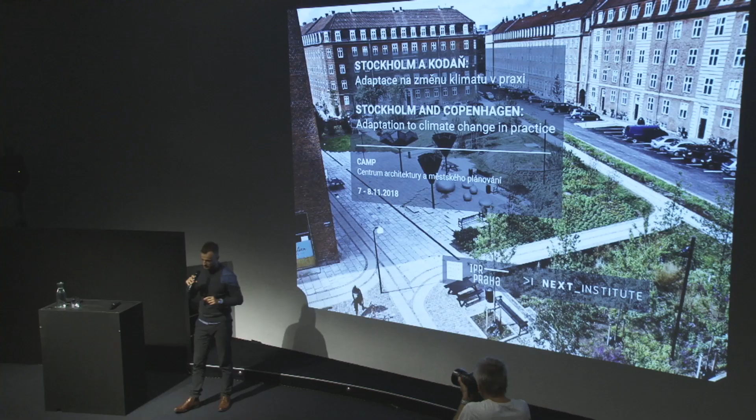So basically today we have asked our guests with topics specifically addressing the needs of the Czech context. Because we work with IPR, we are well aware of what challenges we have, but we are sometimes not really sure how to overcome them. We know that our friends from abroad have experience with these topics, so they are here to help us. It's not just another talk about sustainability, but something very specific, so we hope this conference can have a real impact.

Today we have a public lecture, and tomorrow we have a meeting for experts with lectures and workshops. We're going to try to uncover the key points with Czech experts, working together hand in hand. I would like to talk a little bit more about our organization and what we do.

We do applied research in architecture and urbanism, and we work a lot on adaptation to climate change, and this is what brought us together with IPR.

We're originally from Brno, and we know the city has a strategy for how to adapt to climate change. Many cities in Czech actually do — the major ones, Prague, Ostrava, Brno, are all covered, and even the smaller ones. What we don't know is how to implement the strategies, where to start, how to do the first steps, how to do pilot projects.

So we thought it could be cool to try something quick, like a brainstorm on a model, so we made this installation. It was there for the autumn, and the goal was to try to collect data and see how this works. This is a preliminary look — we're still working on the data.

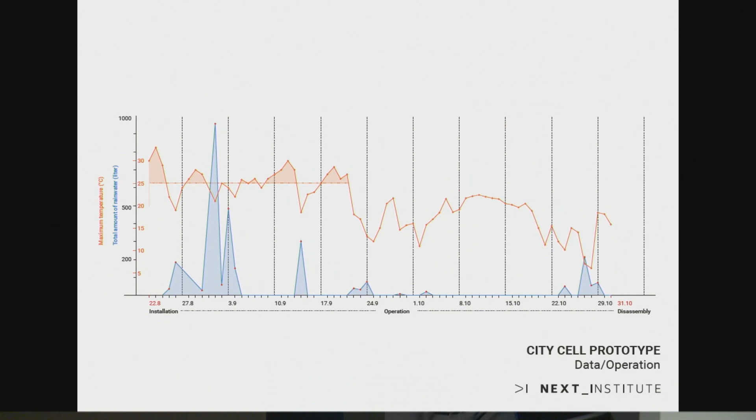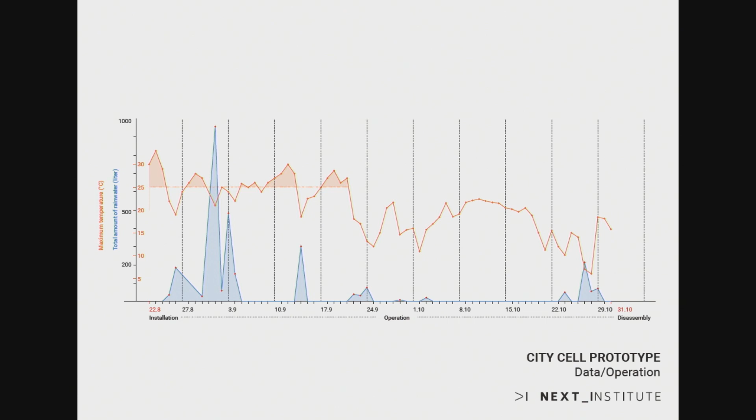What we can say is that we have real trouble with the extremes. The blue line is the rainwater, and the red line is temperature. You can see the combination of high temperature and no precipitation is really problematic. In order to keep our urban greenery healthy, we need to add a little bit of technology. That was our goal — to find these loopholes and figure out how we can assist urban greenery with a little technology.

You're going to see more of our work through our Facebook and web page — we're going to publish the findings of this project. But basically, this is exactly what we want to talk about at this conference: implementation, doing real projects, and pilot projects.

So I would come back to the first slide and ask the first speaker to give us a little introduction to the Prague context — the head of the Green Infrastructure Department at IPR, Mr. Jan Richtr.

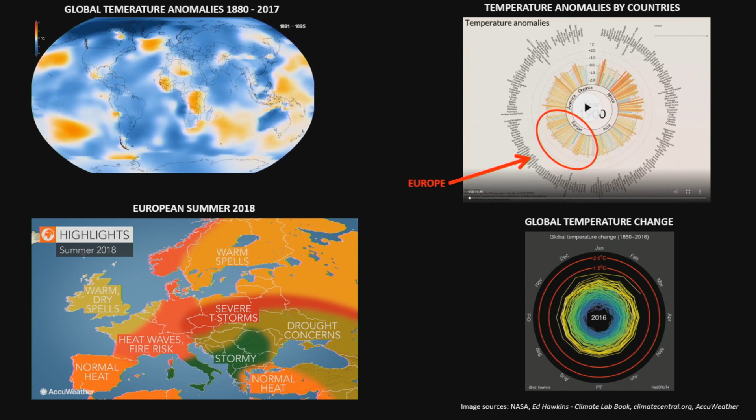As you all know, in the last decade, or maybe a couple of decades, not just here in Europe, in Central Europe, but all over the world, we are experiencing climate change. In recent years we are not only reading about climate change in news and scientific articles, but actually experiencing it in our real lives. This summer was proof of that, and we, much more than before, have to solve how our cities will adapt to this changing situation.

As you know, most of the population today, not just in the Czech Republic or Europe but also globally, lives in cities, and cities will be the place where our future happens. From the dawn of civilization in the Middle East, where cities started, until today, where megacities, the megalopolis, are the center of trade, economy, and also our culture — cities are and will be where basically most of the things will happen.

So the cities are our future, not just in Europe, but also worldwide. We have to learn how to make them livable and how to stay cool and dry in the cities. The future can look like this in 20, 30, maybe 50 years from now. It can be vibrant, green, livable cities where we are going to live, or it will be flooded with heat and drought. What will become depends only on us.

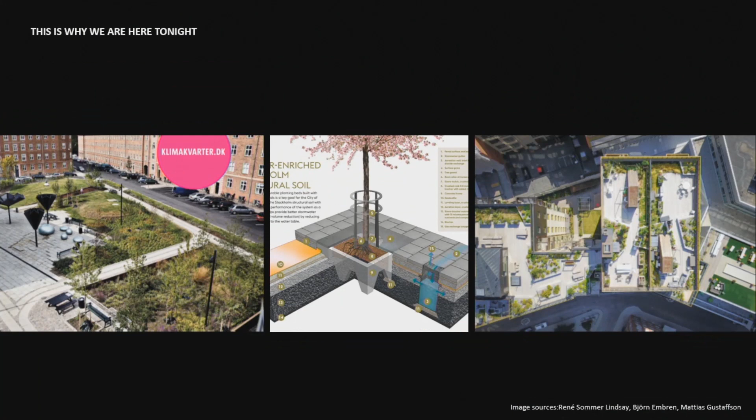We also are part of some European projects, and this is why we are here tonight, to hear what we can do and how we can change our city, how we can adapt, and how we can employ nature for our benefit. So thank you, our guests, and thank you for listening, and enjoy the evening.

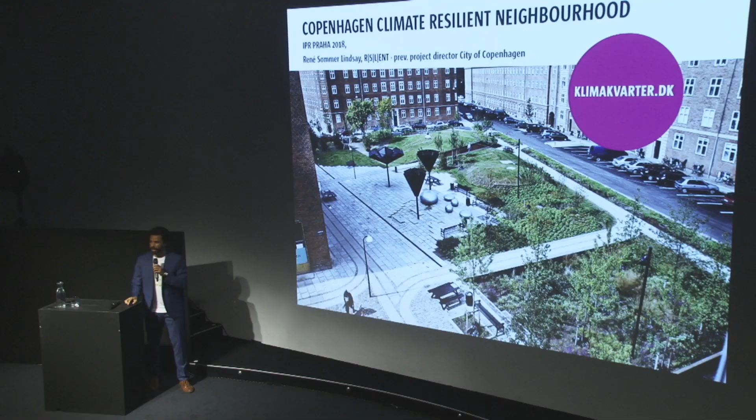Thank you so much for inviting me. I'll speak a bit about Copenhagen. I worked with the city of Copenhagen for almost 10 years in different roles, most recently as an advisor on the citywide adaptation plan, and before that as the director of the project Klimakvarter, where we did the first adaptation solutions. So I'll be speaking about paths to adaptation, structured around four themes: urban leadership in a wider context, and then how we got to implementation and achieving further support to implement the full plan.

Copenhagen is, in urban planning circles at least, a well-known city. We have Jan Gehl, we have a very ambitious climate action plan to be carbon neutral by 2025. We pride ourselves on being the best cycle capital in the world, even better than Utrecht or Amsterdam, whatever you might think. It's well known as a rich, well-off city, usually one of the best places to live in the world by all these standards. Lonely Planet said it's the best place to go also next year, so come visit, although I'm in Edinburgh at the moment, but I'll be back.

But of course there are also issues. Some of the main issues in Copenhagen is that it's a very expensive city, so we are experiencing a degree of urban inequality. It's difficult to find affordable housing, and we do have areas of the city that become a bit run down and overlooked. We also have strategies to deal with these areas, and that's actually where I started. I started working with urban regeneration in an area called St. Kjeld's Kvarter, which is kind of the outer part of the inner city.

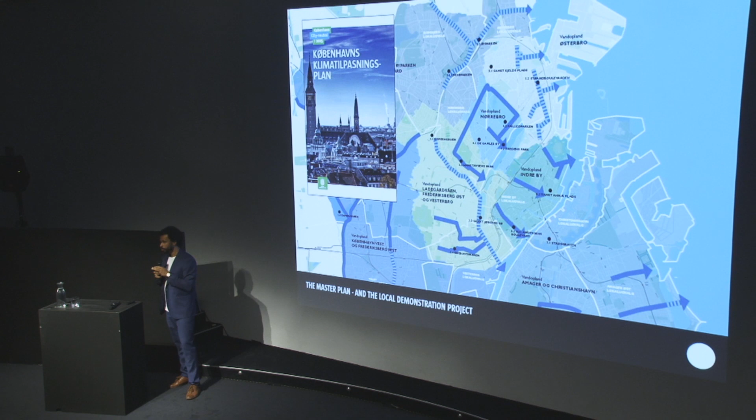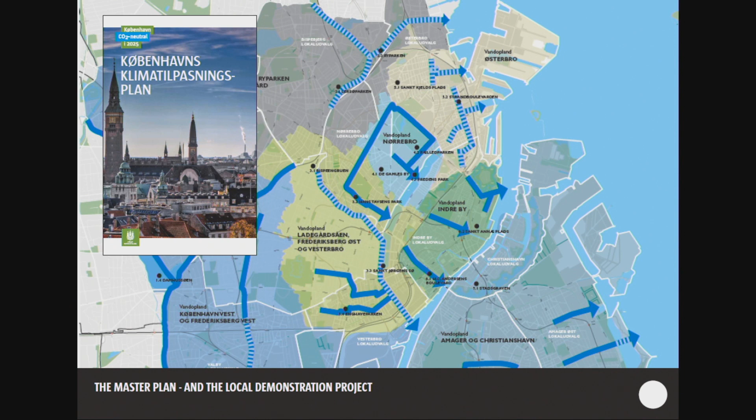It took some years, but at the moment the politicians of Copenhagen have actually said that within the next 20 years we're going to spend €1.5 billion implementing around 300 projects around the city to handle rainwater. There's been an analysis of rainwater flows in all of the city in 7 different catchments, looking at natural rainwater flow and how we can steer the water out of places where it does damage and into the sea or into big parks where it doesn't damage buildings or people.

But of course, a €1.5 billion plan is not something you build overnight, and we needed to get experience with how to actually apply it. That's where we had the opportunity to become the Klimakvarter.

To begin with, I was the head of områdefornyelsen Sankt Kjeld's Kvarter, and this was a local regeneration project, but we partnered up with the wider city's climate adaptation plans, with the local Agenda 21 Center, with the utility company HOFOR, with the Ministry of Housing and Development. And what we basically did is started to speak together and combine our budgets and combine our stories, essentially combining the narrative of where we were going.

By getting shared goals and shared interests, we could create the concept of Klimakvarter. So Klimakvarter doesn't actually exist. It's just a website that collects a number of ongoing projects that different actors were doing. But it became very impactful in that form.

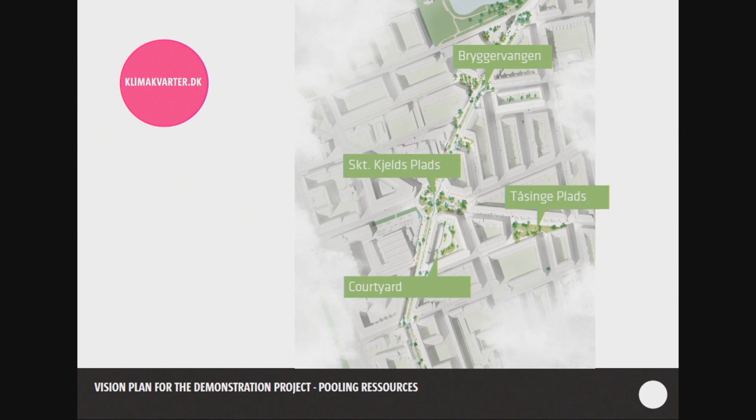Together we developed a vision plan for the area, developed by the studio Tredje Natur, involving changes to streets, to squares, and to inner courtyards. We started to show people in the area how it could look in the future, how they could reimagine the area. So involving the community was our next plan.

The area, as I said, is—I'm not going to say socially deprived, because that would be saying too much. Denmark is quite a rich country, but it's the poorer part of Copenhagen. There are certain buildings that have very high levels of social deprivation. We also have another corner of the area where the Prime Minister used to live. So it's a mixed area, and what was really obvious to us when we were there was that people weren't connected. They weren't speaking to each other, they weren't really interested in each other. But Klimakvarter became a way for us to make it into one coherent neighborhood and to make the people speak to each other.

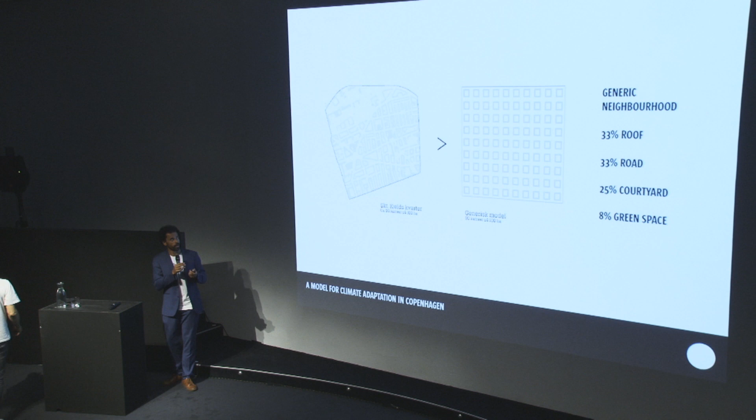We wanted to create a model for climate adaptation that could be used in the rest of the city. So we needed to speak about the area as a generic urban form, and it is this classical Copenhagen, or really a continental European urban form—5 or 6 story houses, around 33% of the area is rooftop, 33% is street, a quarter of the area are inner courtyards, and less than 10% are green spaces.

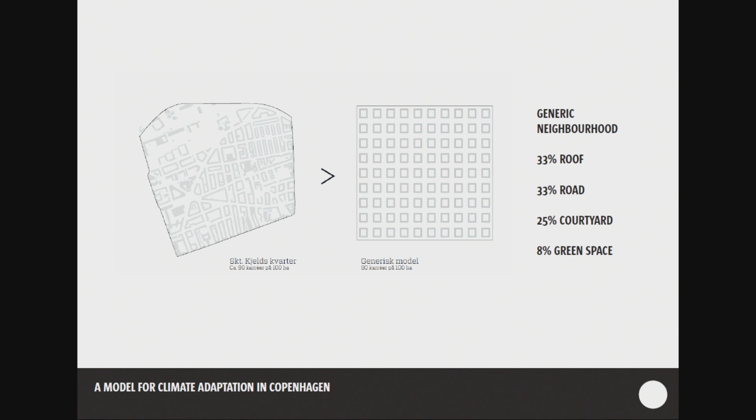What we wanted to find out is, in the future, when it rains, what do we do? Tredje Natur actually won this early competition by proposing a very simple tactic, looking at the streets, concluding that we didn't have a lot of traffic, but we did have a lot of parked cars. It was actually possible to cut away 1/5 of the street width to liberate 50,000 square meters of asphalt and turn it into green space.

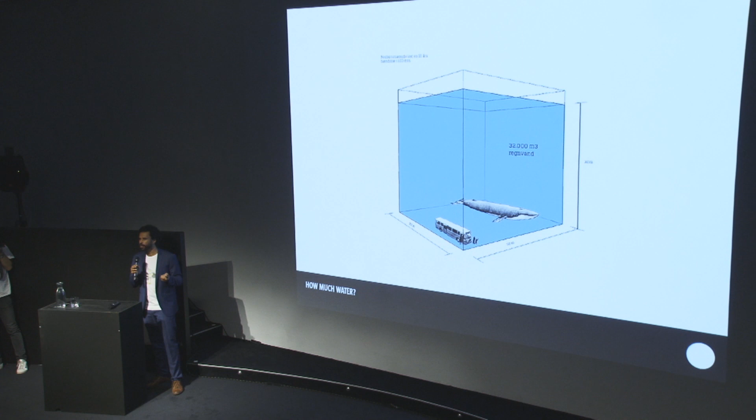That would, of course, make the area more beautiful, but also give us a place to handle the rainwater. This is the amount of rainwater that falls within the area in 2 hours during what we call an everyday rain. So essentially, this is the capacity of the sewer system today.

If any of you are hydrologists or hydraulic engineers, I should be speaking about flow and Q values, but that's not important. It's a pedagogical approach to speaking about water with the people in the area. So this is the amount of water we could handle.

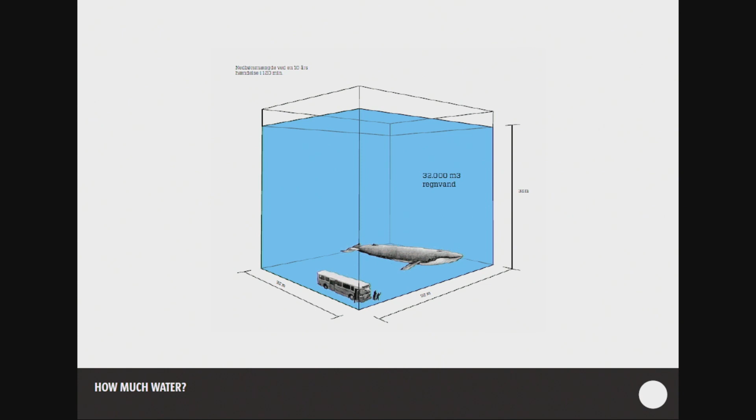This is the projection of everyday rain in the future, and this is the amount of water that falls in what we call a 100-year rain. The extreme event we had in 2011 was actually a 400-year event, even more than this. But the business case in Copenhagen is to say, if we can make sure the city can handle this amount of rain, we'll be doing all right.

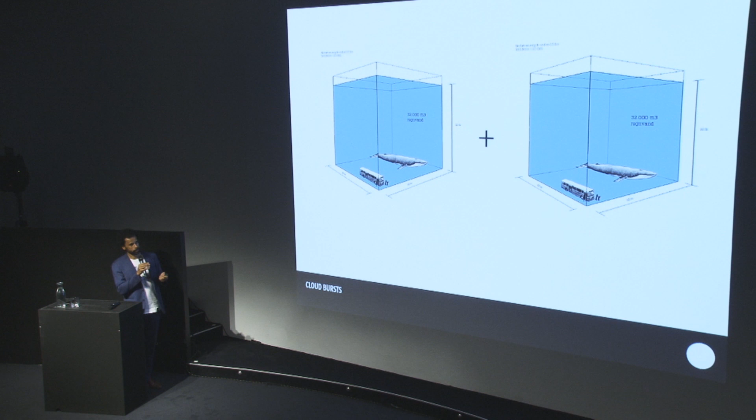So it's a technical approach combined with a soft landscape engineering approach. The technical approach is that we were close to the harbor, out here, and we needed to find the central lines to get the water out there, the blue lines essentially. But we also wanted to provide improvements to the area.

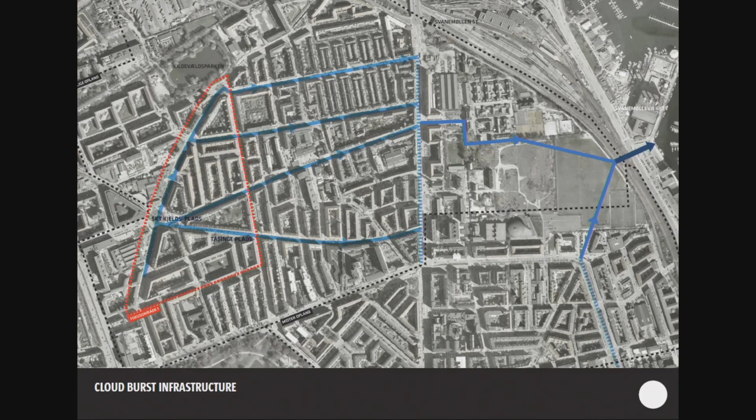We also did a mapping of spatial potentials of areas such as Tåsinge Plads and Skt. Kjelds Plads, that had a lot of excess space and opportunity, and we mapped out where we could improve it. This became a layer on top of the technical infrastructure, saying that if we provide green infrastructure for handling rainwater during everyday rain occasions, we can also bring benefits to the area when it's not raining.

And that's the strategy behind Klimakvarter. This became a way for us to speak with people in the area and get them involved in our project, to help them, to let them help us understand the potentials in the area and how we could benefit them with the project.

Our next step was to support the first movers and help people get into the understanding of what we were doing. Tåsinge Plads is a good example of this work.

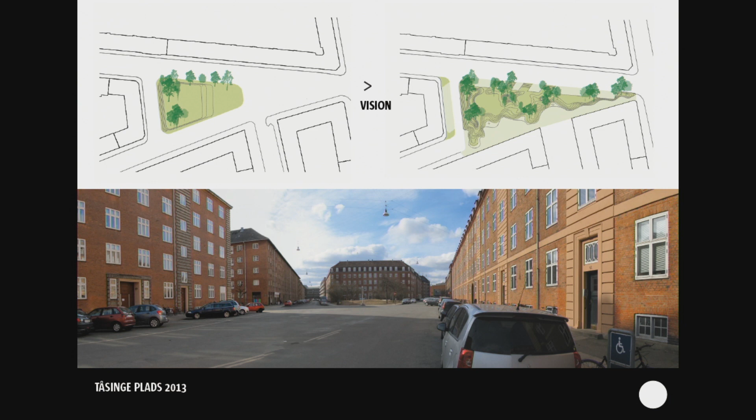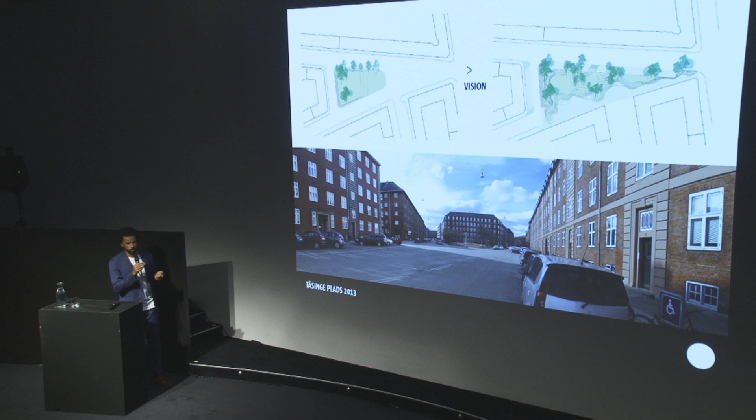We had an area with a lot of excess asphalt, open streets. In terms of traffic, it was a bit dangerous because you had two two-way streets meeting on top of each other, which from a traffic engineering point of view is very impractical, but also it was just not a very nice place to be. And we needed space to open up that we could use to handle rainwater.

So the basic idea was to expand the green space all the way out here, basically dig a big hole and put water into it. And this was the idea that we presented to the area.

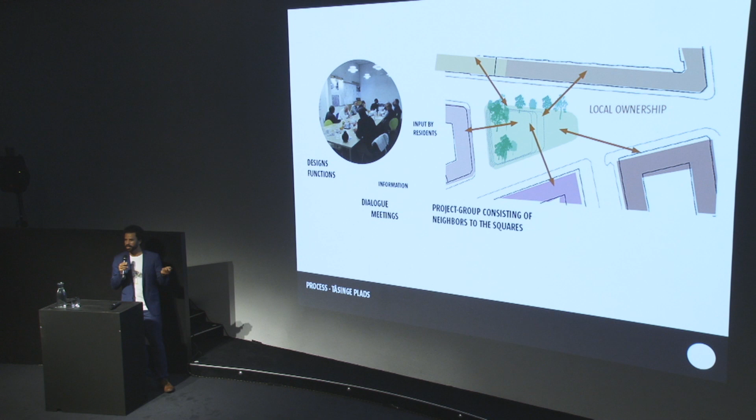Then we started speaking to them about how best to do it. We held a lot of meetings with residents associations in the areas and got their input. At this point, it was actually a private street, so we couldn't do anything without their approval. So I went to a lot of coffee meetings with these people to try to convince them this was a good idea. Even though the municipality was bringing pretty much all the funding, we really needed to make them see that this was something that was necessary.

Of course, it helped a lot that we just had a giant cloudburst and all their basements had been flooded. But still, it was very important to get their support and also get their information and their resources to help us make a better project.

So we also went into the square. This small square here was a small green spot before, but locally it was called Shit Island because it was mainly used for dog walking, or only used for dog walking. And because it was only used for dog walking, people were pretty much just leaving stuff behind.

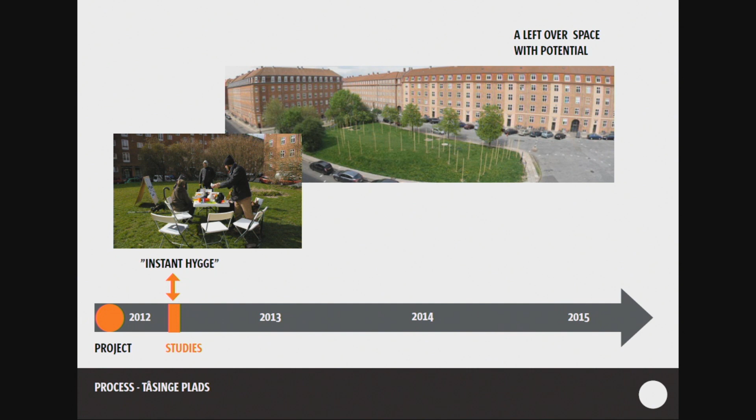So we worked with a number of international artists who had a residency in this one building with the most social deprivation. They got a flat on the 11th floor and lived there for 3 months doing projects in the area. One of the projects was that they found Tåsinge Plads. And this guy, David, did a project called Instant Hygge.

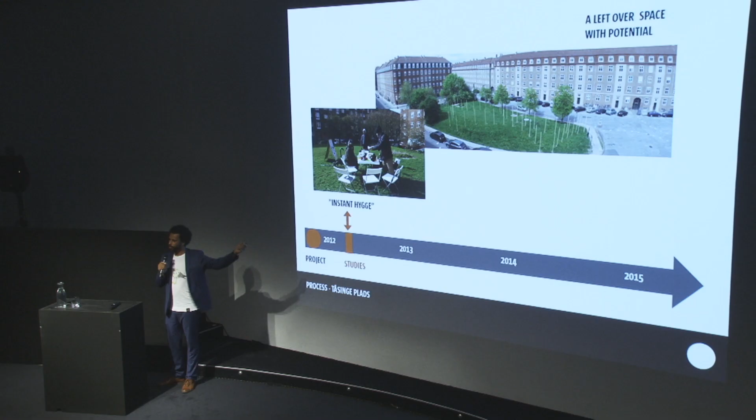I don't know if you've heard of the Danish concept Hygge. So, Instant Hygge, free coffee. He went there every weekend for 3 months with a sign saying Instant Hygge, free coffee, and these pull-up chairs, and asked people to sit down and speak to him about what the area was, and change the mind about what Tåsinge Plads could be. And it also informed our project.

We also did some larger scale projects. This is the former Minister of the Environment, scything the area. We did some small festivals, a large festival, and just started to get people thinking about the potentials of this area in a new way.

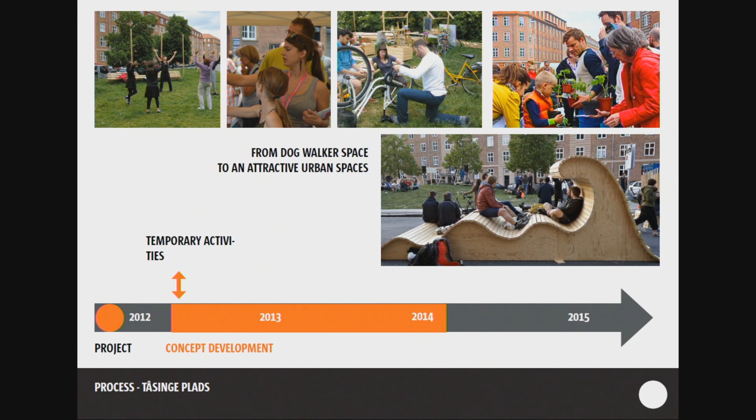And all the input that we got from people using these spaces, coming to our events, speaking about what type of planting they would like in the area, what type of activities, what type of urban furniture they wanted, gave us input to the project that we could build in the future.

Something quite unique for Copenhagen was that the project was actually signed off by the 5 housing associations around it. I was part of writing the design brief that the landscape architects did, but it was actually the residents who approved it.

So the Klimakvarter project became kind of a platform for us to collaborate with the community and to build a sense of community in the area. But it also became a platform for them to start speaking to the rest of the city and to reach out to politicians, speaking about all these ambitions we have for the city and why funding wasn't coming to that area. And it was quite useful.

The farmhouse was turned into a restaurant, and it became an attraction that people from abroad would go to Noma, and they would go to this place to eat. So suddenly we had a destination, and this overlooked part of Copenhagen was something that people wanted to see. It really changed the whole concept of the area.

So climate adaptation for us became partly a technical solution to help, but very much also about changing the whole mentality in the area. Last, I just want to say that the municipality is actually still constructing out there.

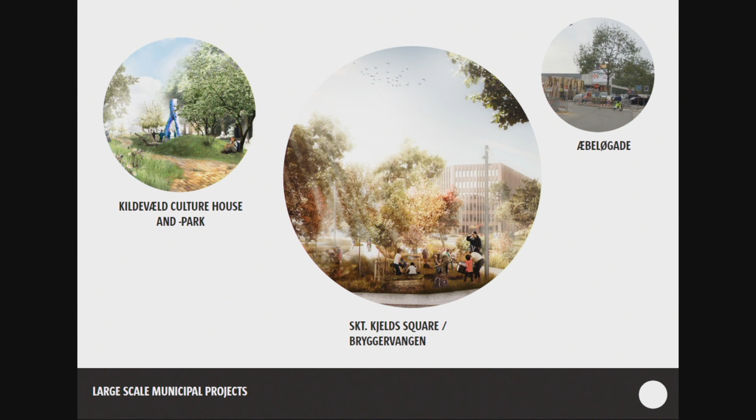We're building a culture house that will be finished in 2020. We're building Skt. Kjelds Plads, which will be finished within a couple of months. And we're still supporting a lot of small-scale projects just to keep the atmosphere going.

It means a lot because they own the story, but they also tell the story, and when politicians see something good happening, they want to fund it, they want to promote it, and they want to help it. So we got a lot of credibility by doing this project and delivering it very fast.

I don't know how it is here in the Czech Republic, but we presented the first idea in 2012, and we had a finished project in December 2014. By Danish standards, that's like Usain Bolt fast.

But it was really good, because people liked it, and they saw that we meant it seriously, something was happening. It gave a lot of good press. It gave a lot of further funding for the projects.

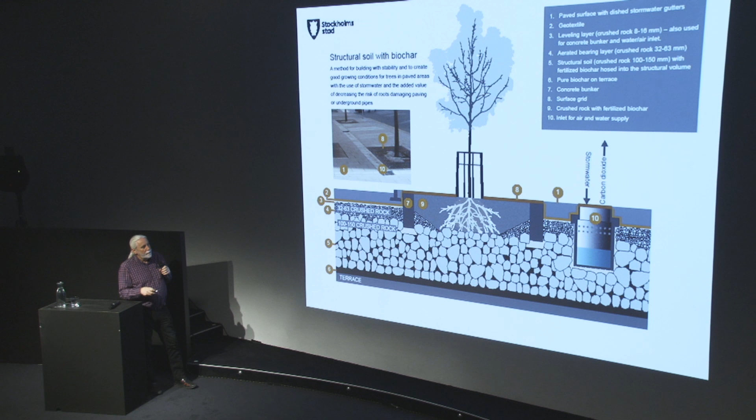So I couldn't touch that level at all, and I had to think of a way to build a planting bed for the trees below the surface. This is how it looks: we use big stones, 100 to 150 millimeters, put out in 30 centimeter layers and compact them heavily. Then after the stones are placed, we flush down material between them—in the beginning it was soil. We put the next layer of stone on top, so they always get support from the stones below, and compact it again. This is the planting bed for the trees, where the root system develops, and there's enough porosity in that material for the roots to grow.

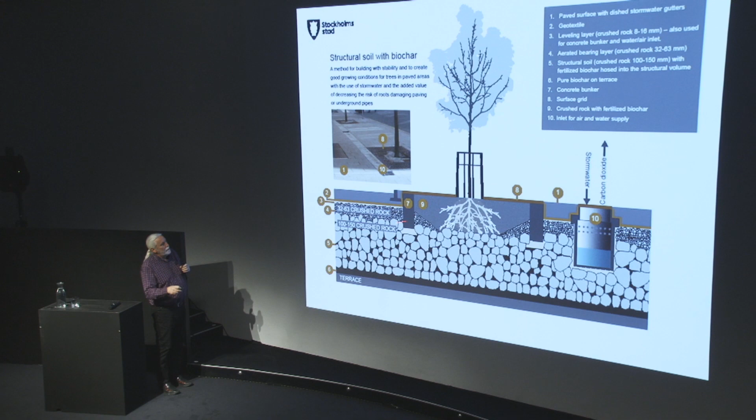On top of that, we put a clean layer of stones, 32 to 63 millimeters, also almost single-sized like a fist, and compact that too. That layer is for infiltration of stormwater and to get the gas exchange to work. And that's the really important thing—these layers make the gas exchange work.

The solution to get gas exchange in the ground was to put in a well that could take in the stormwater. At the same time, as the water goes in, it presses out the gases from the ground, and when the water drains away, it draws in oxygen from above.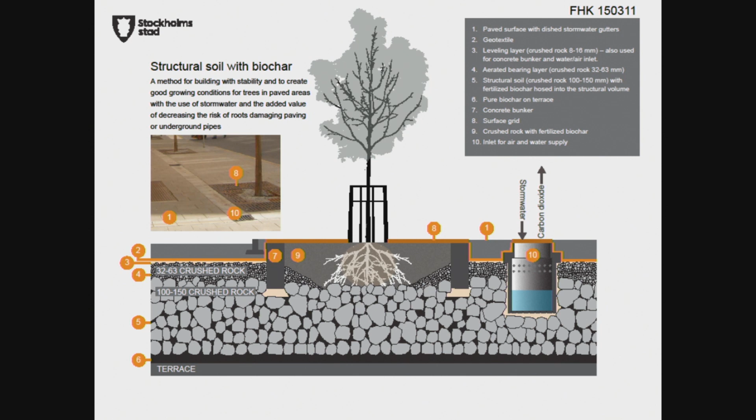So this was a great success from the beginning. The first trees we planted in this solution started to grow immediately, and we have used it and built it in Stockholm in the same way since 2003 now. So we have around 15 years of experience of this kind of construction.

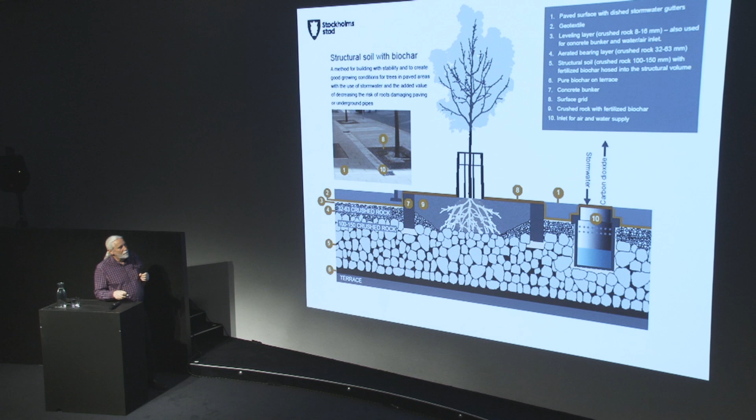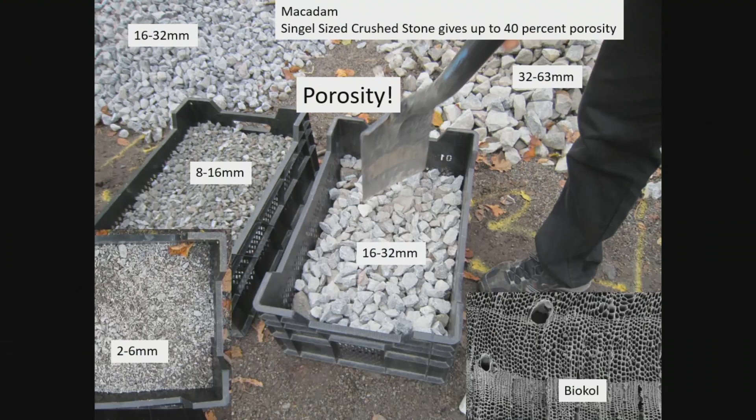And it really gives you the opportunity to build something in old cities. It's easy to combine in quite narrow streets and sidewalks, you can still have the old kind of sidewalks if you do this kind of construction below ground. And what's most important is this single-size kind of stones that we use all the time, and that gives us the porosity of the material. That's the most important thing to remember with our solution, that we always use this kind of material.

And when we combine this with biochar - I don't know if someone knows about biochar here. Raise your hands. One, okay.

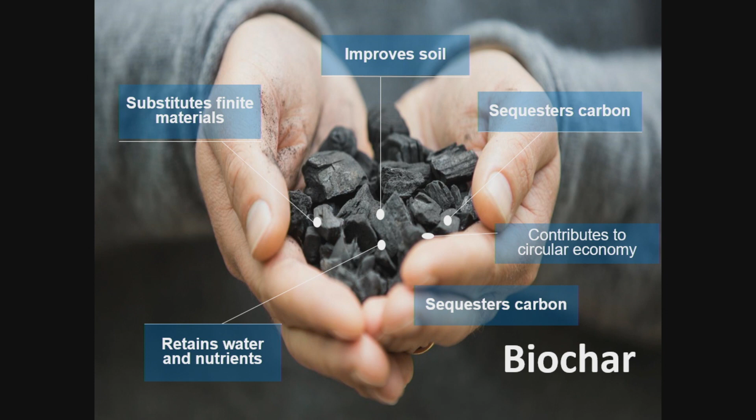This is a big issue in Stockholm. We have stopped using soil at the traffic department. We don't use soil anymore when we plant trees, perennials, shrubs, and things like that. We combine this stone material, as you saw before, together with biochar. Instead of using soil, manufactured soil, we use this kind of mixture with biochar, which has the possibility to keep water and nutrients, and it can clean water.

It acts as a filter material. If you put stormwater down to the ground and you have this material, it acts as a filter. So this is the way it works.

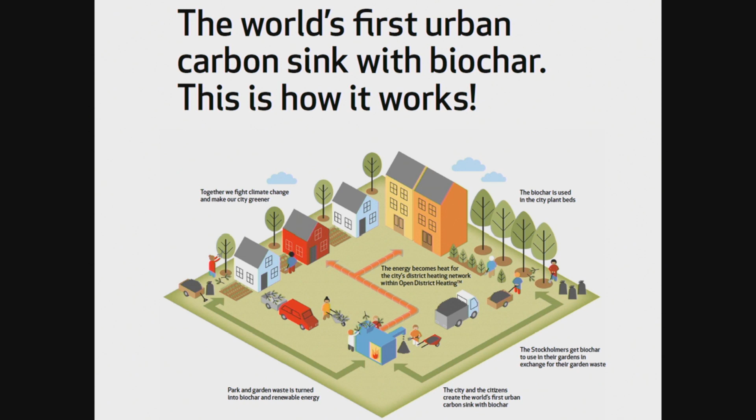We collect garden waste from the citizens of Stockholm, and they come and give it to us at the recycle centers, and we collect it and transform it in a biochar plant, where we make the biochar in a pyrolysis process, heating the organic material in oxygen-free heating, and then we get biochar from it.

Then we use it when we plant the trees in Stockholm, and we also give it back to the citizens of Stockholm so that it can be a part of fighting climate change, because they use the biochar, and at the same time, when they use it for their garden, they lock down the carbon dioxide in the ground.

So with this idea, we won €1 million, so we could build this kind of biochar plant in Stockholm. Now the citizens of Stockholm can go and leave their garden waste, and they will give them back some biochar that they can use in the garden. Most of it I use for the trees in Stockholm.

So this is the basic mixture we use in Stockholm now instead of soil: it's 6 parts of stone, 1 part of compost, and 1 part of biochar. This maximizes the porosity in the ground, so the root system can develop extremely well, and they can develop in any direction they want.

If you have this kind of mixture in the ground, you can use different sizes of stones depending on where you are. This is the smallest fraction, 2 to 6 millimeters, and that's what we use in open perennial borders, shrubs, plantation, or for trees when it's open ground. And if you have heavy traffic, you use this bigger size of stones.

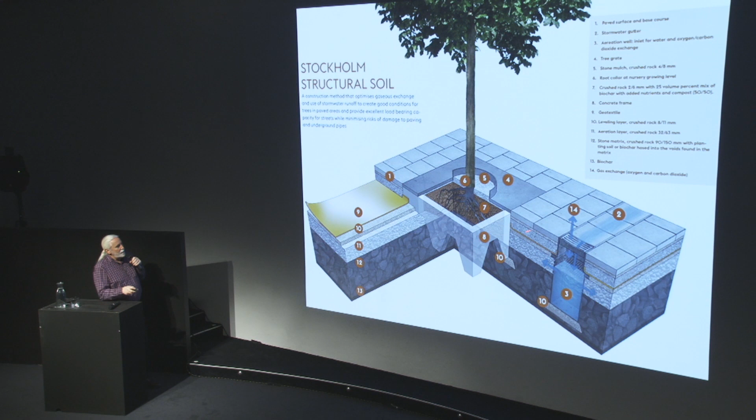You can see the concrete slabs on top, and you have the well. We try to collect as much water as possible from the roofs and from the sidewalks and from the streets, and collect it and put it down to the structural soil, as we call it. We separate the upper layer that the civil engineers want to have with a geotextile.

Below the geotextile we have this 32 to 63 millimeter size of stones, and below that we have the bigger size of stones. This is for surfaces that have really heavy traffic on top of it, that we really have to have a strong construction.

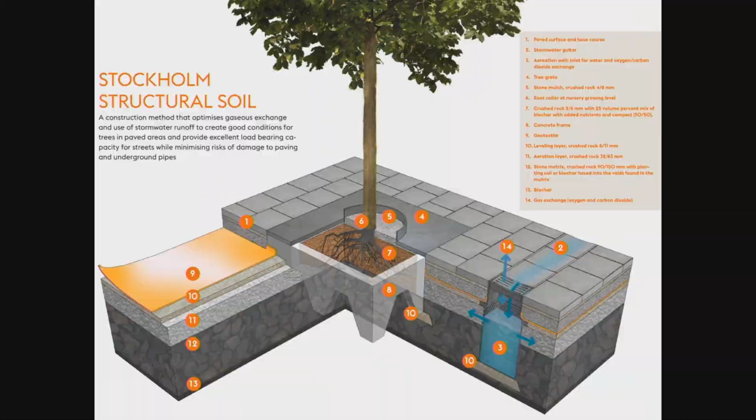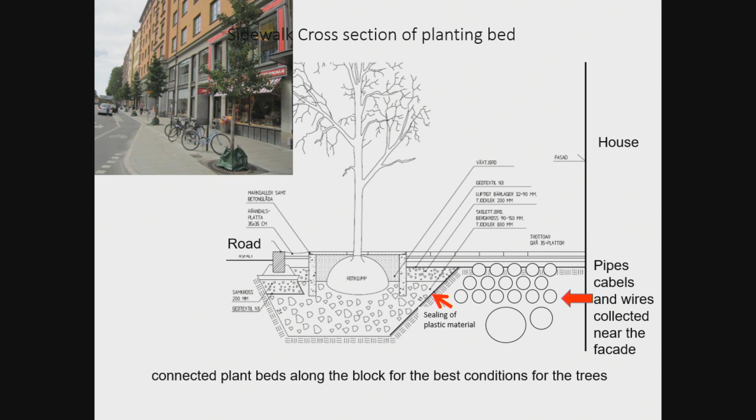We always try to connect as many planting pits as possible, because the bigger areas you can connect to each other, the trees will have better opportunities to develop in a good way. We try to put all the small cables and everything close to the building, and have our construction closer to the road. So this is how it looks.

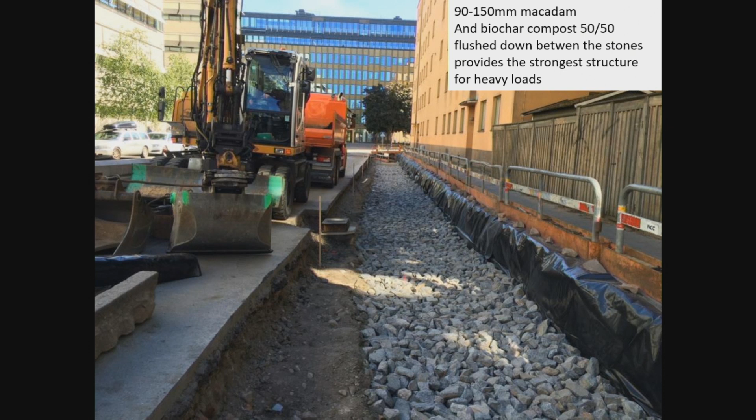We usually do excavation to 1 meter deep, and then we start to fill it up with this big size stones and compact it heavily. The plastic material is just to protect the buildings and the cellars, so we won't press the water into the cellar.

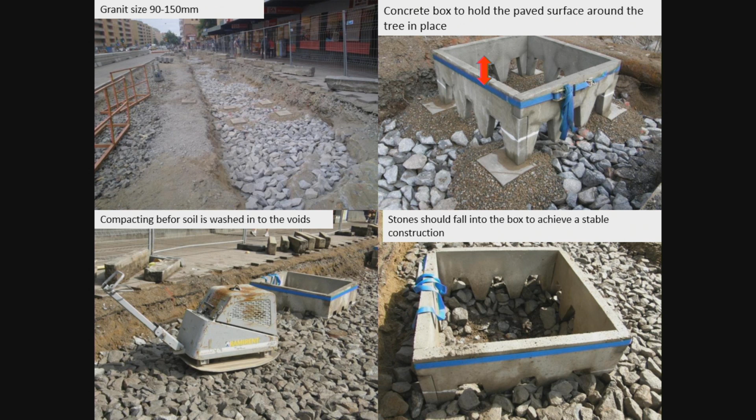You see, the planting pits are connected all the way through the blocks, and these concrete boxes protect the surrounding construction from falling into the tree pits. We plant the trees inside these concrete boxes. This is how we compact the stones, and when we build it, it's important that the stones fall into the openings, so you keep the construction in a good way.

It's no problem to have cables and pipes and everything in this kind of construction. It doesn't harm the tree roots in any way. In the beginning, of course, the owners of the cables and pipes are a bit afraid of what we're doing, but we are convinced, and now it's no problem anymore to build it like this in Stockholm.

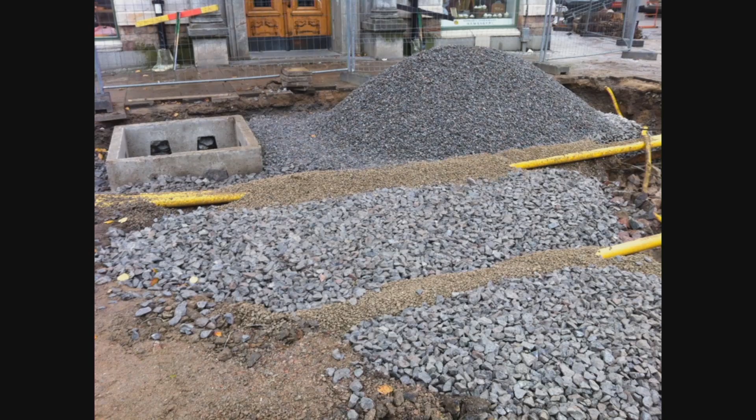So this is when we have a hose with water and flush down the mixture of biochar and compost between the stones. This is when the voids between the stones are filled with the biochar and compost.

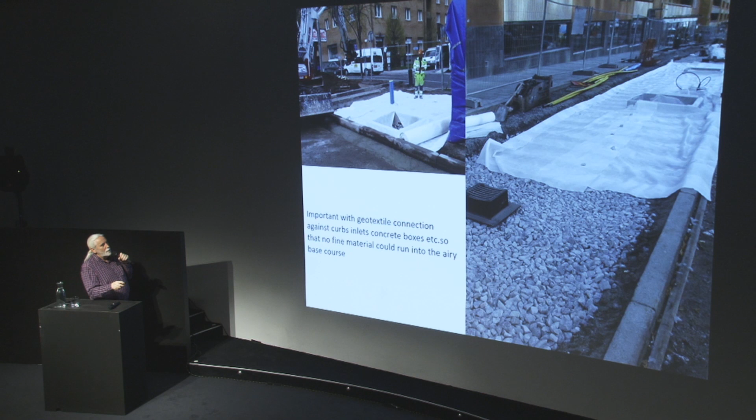So this is 2 layers, and now the infiltration layer comes on top. Here's the infiltration layer and the wells that take in the water to let it out into this infiltration layer, and then we have the geotextile. Then you can do anything on top of this. You have secured the porosity, the gas exchange, and the water for the trees in this way of building.

The next step is to find out the best way to collect water, to get as much water as possible. It's quite dry in Stockholm — we have 600 millimeters of rain water every year, so it's extremely dry. In the beginning we just took water from the sidewalks, but now we take it from everywhere, from the streets, wherever we can get it.

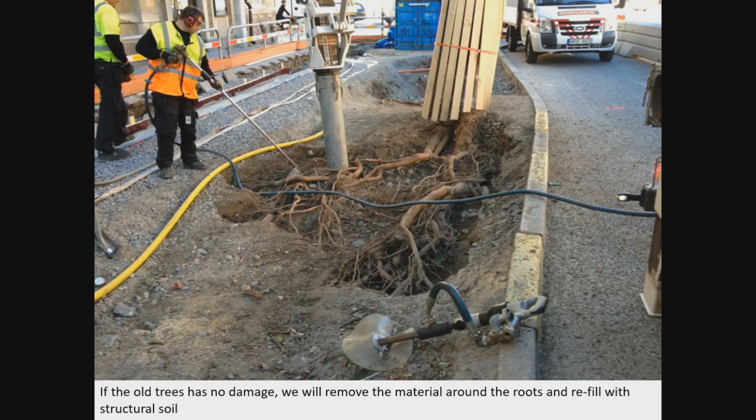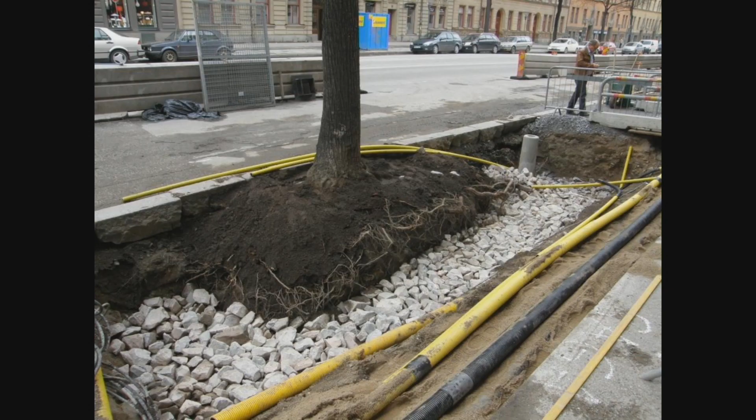Of course, if you have old trees, we take away — if they're in a good enough condition — all the old material that is bad for the trees, and put our own structural soil instead around the tree roots. This is how it looks when we've done this work on old trees, and we start to build structural soil around them.

A good thing about it is that the mycorrhizae also love this kind of solution, because there's so much oxygen in the ground, high humidity in the ground. So after just 1 year, you can find a lot of mycorrhizae in the ground, and that will also support the trees and make them develop in a good way.

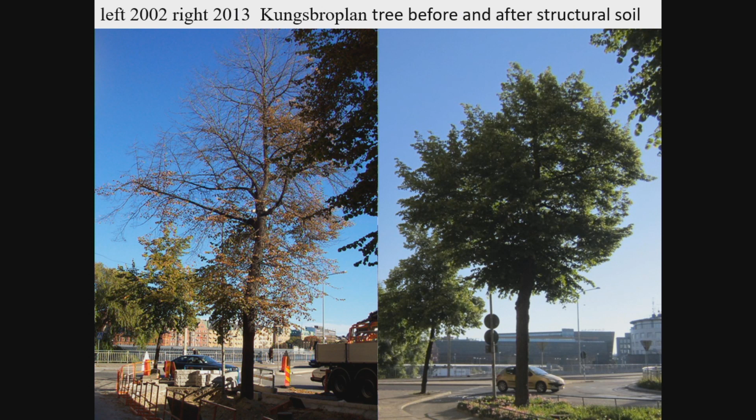This is one of the pictures that really made it for me in Stockholm, when I tried to convince the bosses and the politicians that this is a good way of handling trees, because this is how it looked after a couple of years. This is when we did the renovation of the old tree, and it's easy to understand the benefits of a tree that looks like the one on the right side compared to how it looked before. There are no environmental benefits from that tree, but from this tree you get a lot of benefits.

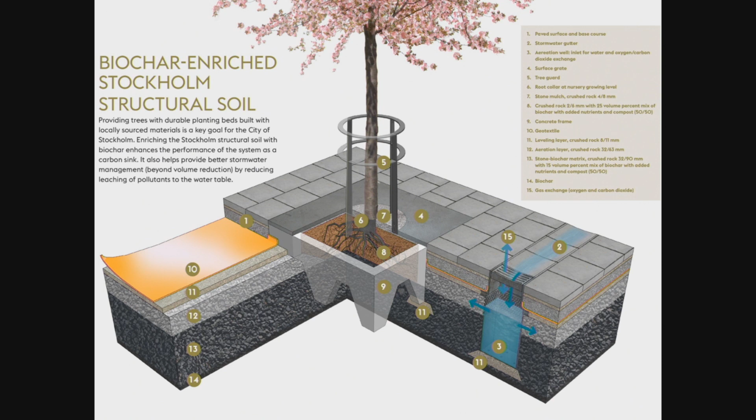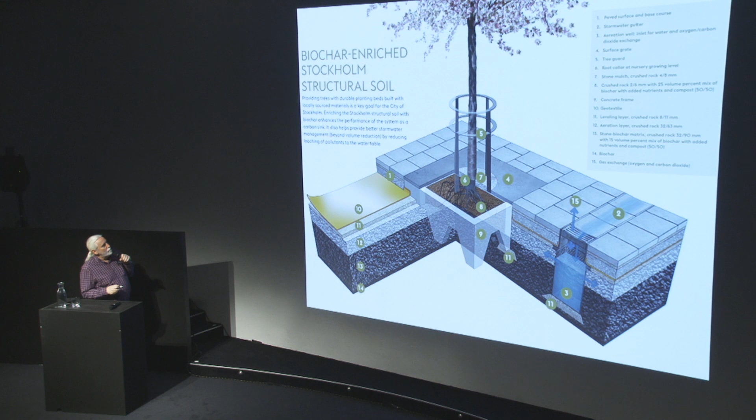And of course, in the beginning, it was just to save the trees, but it has been more and more. The most important thing is to take care of the stormwater locally, and so this is the solution that Stockholm proposed to solve the problems in the city for the 20-year rain. It will cope with that, and it's enough to work with. So this is what we work with in Stockholm all the time now.

Different kinds of sizes of stones depending on the loads on top of the construction. The smaller size when there's no load at all, and the middle size when there's a middle size load on top.

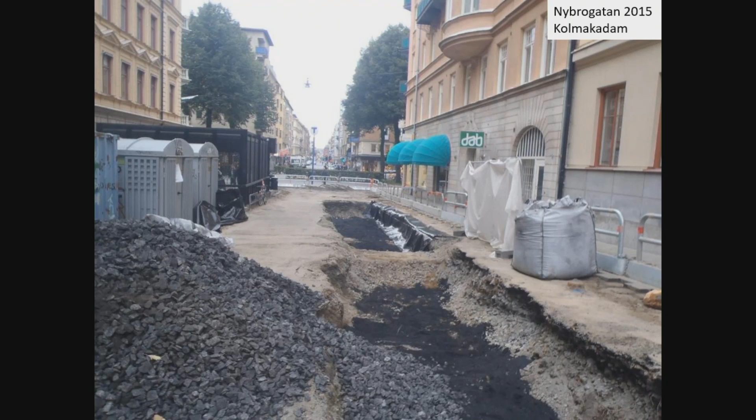So we use this biochar, when it's clean, as a filter in the bottom of the construction, and then we put the stone with a mixture of biochar and compost on top of that, and then we plant the trees on them.

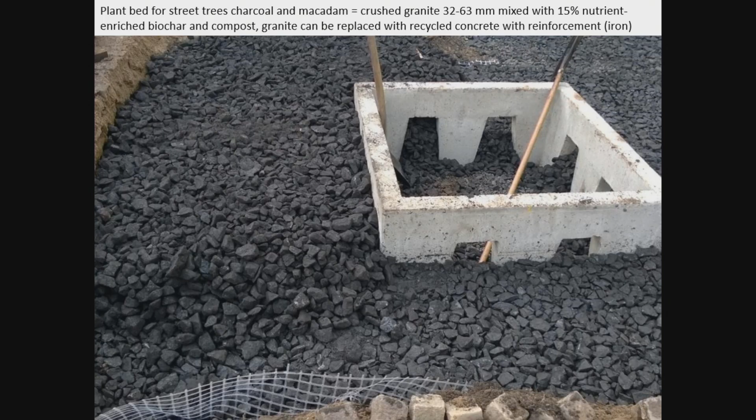What's happened, one of the clues in this solution, is that there is no limit for the root system to develop. They can go in any direction they want, and that's why they get so resistant when it's dry weather.

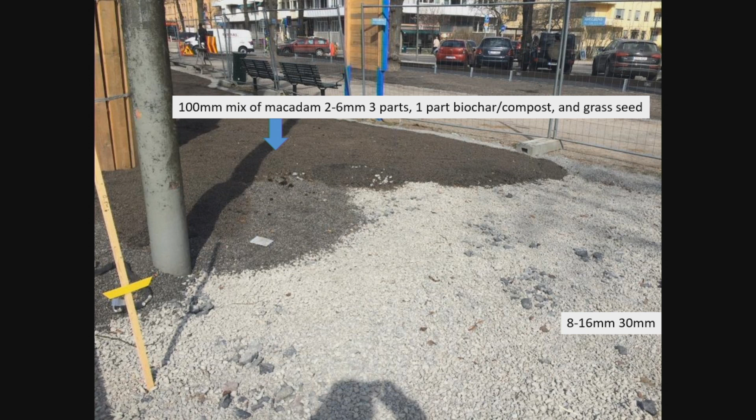So this is the middle size, 32 to 63 millimeter stones, and then on top of that we put a smaller fraction, so we don't have the surface layer fall down into the bigger fraction of stones. And then on top we have the smallest size of this mixture of macadam stones, compost, and biochar, and then we put grass on top of it and get these results.

So it's quite astonishing to see that this mixture containing recycled materials from the green waste of Stockholm can work in this way.

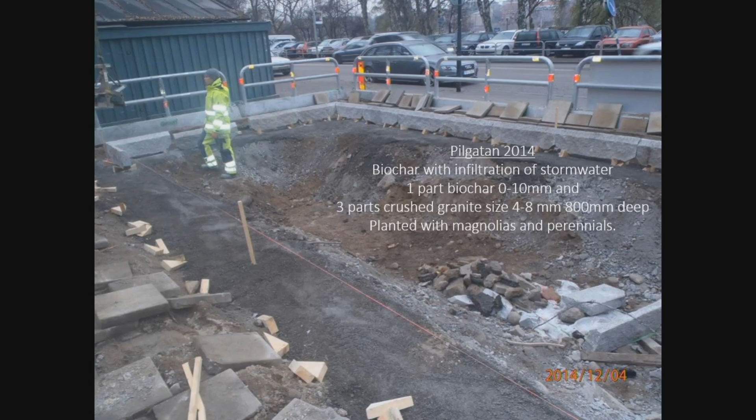Time, I don't know. Someone has the time? Something like that, almost there.

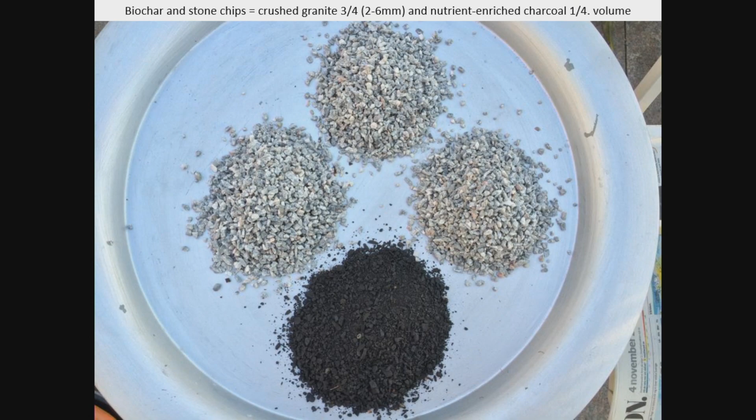So this is the mixture, the standard mixture: 3 parts of stone, 1 part of biochar, that we started with. And this is a perennial border with this mixture. This was before we started to use compost, and we get even better results when we start to mix it with compost. Two magnolias and perennials.

So you get all these benefits. You reduce the risk of flooding because every tree uses the stormwater. Every tree has a well and they can take the stormwater.

When the trees are developing so well, they can also reduce the presence of particles and carbon dioxide in the air, and just reduce the load of the stormwater system and the pollution that otherwise would come to the lakes of Mälar and the Baltic Sea.

And at the same time you lock down carbon dioxide when you use biochar in the mixture with the stones. So it's easy to see the benefits of using this solution for trees in the city.

And we have this handbook that we have worked out. So far it's in Swedish, but we will come out in English in a year, within a year, I would say.

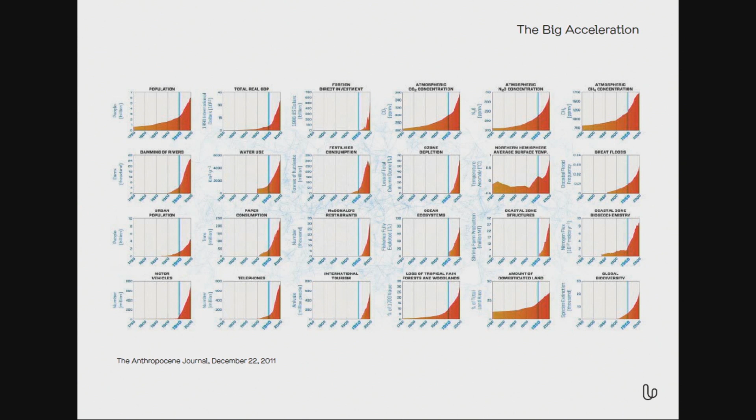Red, green, and blue—it's about creating more nature into our cities, nature and water. But what we as landscape architects are really interested in is not only inviting nature into the city, but also inviting the people in the city to meet up with that nature.

We talk a lot about urban ecosystem services in Stockholm right now—the municipalities are really eager to discover how to use this. You also probably know of the global goals of the United Nations, which is really something to look into if you haven't seen it.

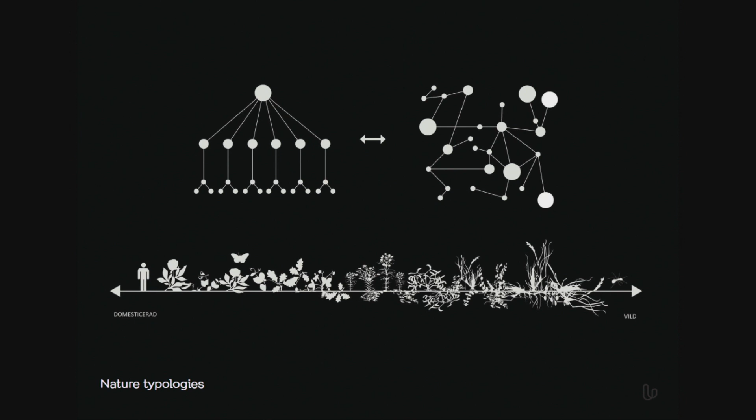This nature that is being added into the city can be so many things—that's what really interests me a lot. It's not only the rain, not only the vegetation, it's about the skies and everything, from the wildest type of nature into the nature that's really domesticated by us as people—how to grow vegetables, and how we organize nature, very much in a German way. Sorry.

So I want to show you some of our ideas, and also some of the projects that are going on in the office right now.

As René showed us, we have to look at the city from a broad perspective. We have to look into the streetscapes, of course, with the trees, and the squares—how can these be multifunctional? As a landscape architect, we also work a lot on the private part of the city, the plots, and there we have the courtyards and roofscapes. Then, of course, we have the bigger parks of the city, and we can do so many things more than we do right now with the parks—it's a huge opportunity there.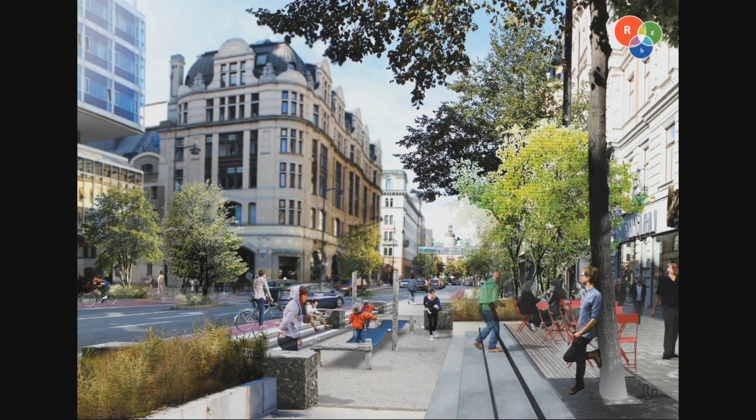So first, I want to show you some of our idea projects. This is, you know it, it's Vasagatan. When you come to Stockholm, you probably start here because it's next to the train station—it's where all the trains and buses from the airport come. But it's a shitty place, sorry—it's loads of traffic and lots of hotels, so people that come here probably end up here in a hotel. But what if we create sunken social activities that are actually used as basins for rain?

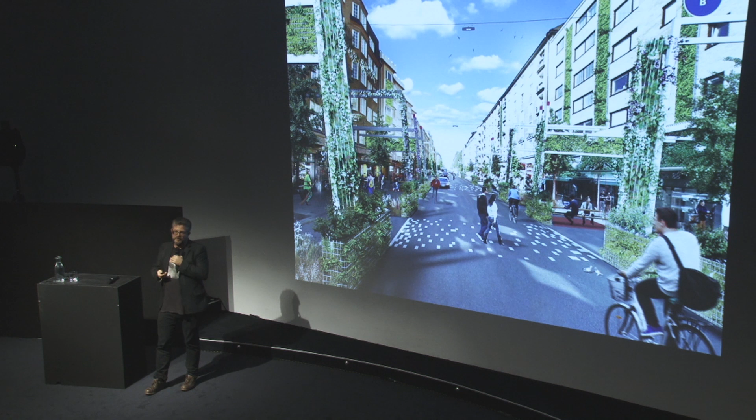Here's another one—the most poisonous area in Stockholm, before Björn started to plant lots of ginkgo trees there. This idea project was made a couple of years ago. But what if we collect the water and take it through pergola structures put in some of the traffic lanes? The cars can still go there, but not as many as before, and the shops and everything can start to use these spaces created by the pergolas, with climbing plants growing up on them.

It would create a totally different streetscape than is there now. Björn is really good with planting a lot of different exotic trees, but what if we look upon the city as a huge arboretum, a tree collection, and put furniture next to every tree with information about it, so people can see what the tree is and how it benefits us. The furniture was designed so you would sit there, start to slip, and suddenly see the tree.

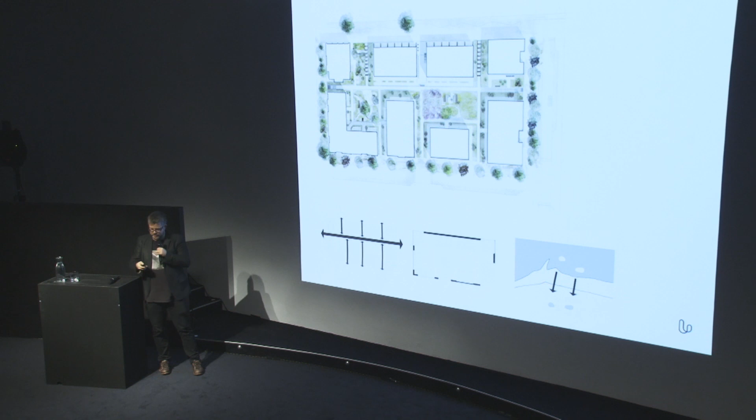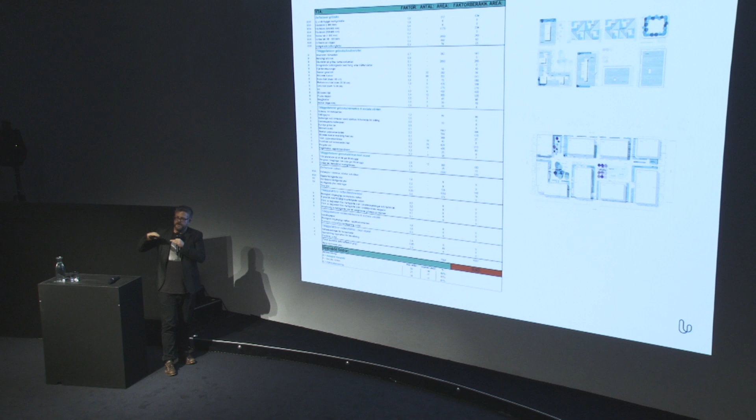This is how the green area ratio looks like. It's really ugly looking - it's an Excel sheet where you put different areas based on the design, from gravel to trees to vertical greenery to roof greenery and everything. It's put there, and then you have to look at the factor to see if you succeed in getting over 0.6 in this case. This was given to us by the municipality and the planning board.

So I have to help my clients succeed in this, and show the city that we are really a green project. This is because in Royal Seaport the amount of cars is 0.5 per apartment, so every second apartment could have their car stored underneath the quarter.

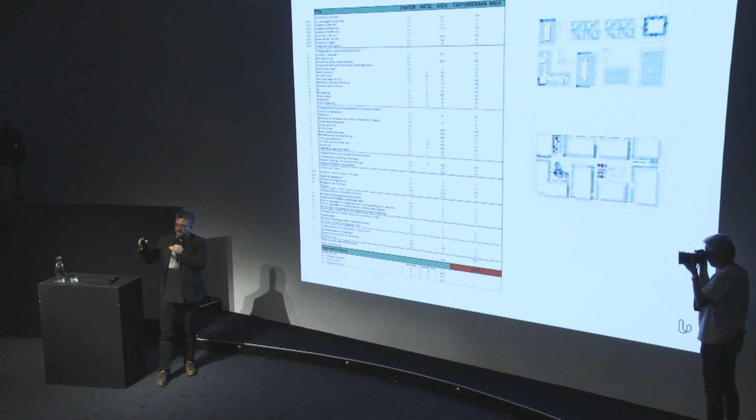We also designed a tool for plant communities. We wanted low plants and a little higher ones in really shady or half-shady spots. These were 4 different typologies spread throughout the quarter, and we had a recipe for each of these areas. As the project changed throughout the process, the amount of different plants just followed it, so it was kind of easy for us.

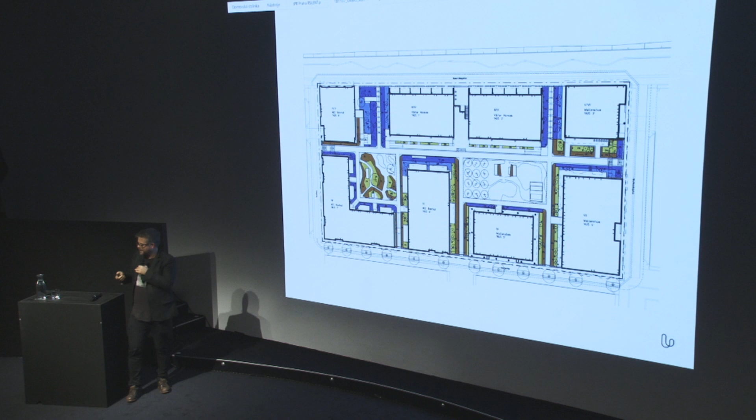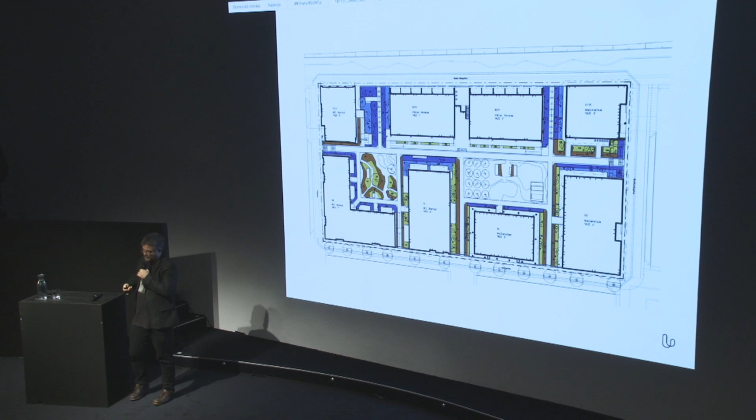But then, of course, the entrepreneur came and said, 'I want to know exactly where every plant is being put.' So we had to design that afterwards, and it looked like this.

We also designed furniture, because Royal Seaport is between a nature reserve called Nationalstadsparken, with lots of old oaks. South of the area is also a huge area with old oaks - it's supposed to be the biggest area of old oaks in North Europe.

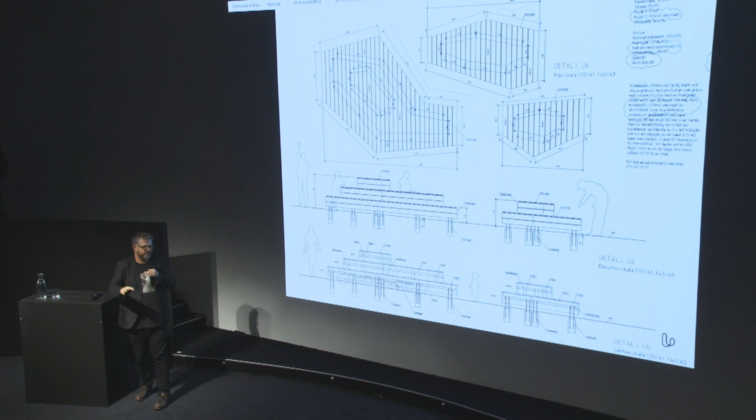So in this city development, if you put oak trees into the quarter, your green area factor went up, and if you put in dead wood, the green area factor also popped up a bit. So we designed this furniture for people to sit on, or climb if you're a small kid, and underneath it we put dead wood chips together with a certain recipe, because we talked to the biologists.

So they should be dead wood chips from oaks, apples, and you know when you make porridge you have the oats. And also, according to the biologist, there should be a dead bird, because all of this was about mimicking an old oak, the hollow oak with the powder coming out - it's called mulm in Swedish. And a lot of different insects, especially bugs, are having their larvae in that, living there for years, and then they come out as a bug.

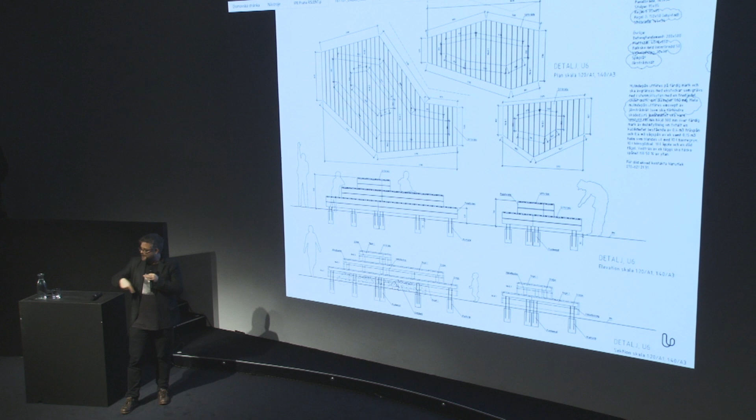And the entrepreneur told me I was sick in my brain. So you have to find a dead bird yourself. So I had to go to this really fancy store in the middle of the city center when I was going there by bike, because I passed by. So I bought a really small chicken, and now it's buried underneath this furniture.

Here's another one, in the central part. The client asked us to do a really green project, but the problem was that the whole plot was a building, and the Stockholm Water Administration asked the municipality to have a really green project. So the municipality asked the client to make a really green project, and wow, we got the commission.

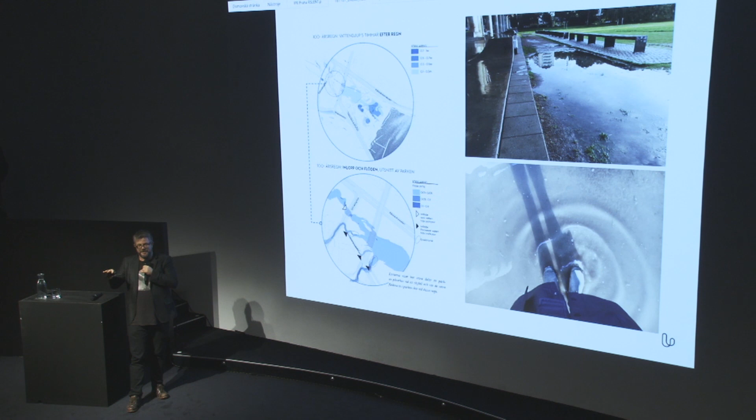And now we are doing number 2 here, it's under construction, but it's 4 different parts. The problem is that it's the lowest part of the whole area, and after heavy rain, some of the park is flooded - but the wrong part of the park where people want to go. So we said we take the water to the periphery instead. So this is the concept of it.

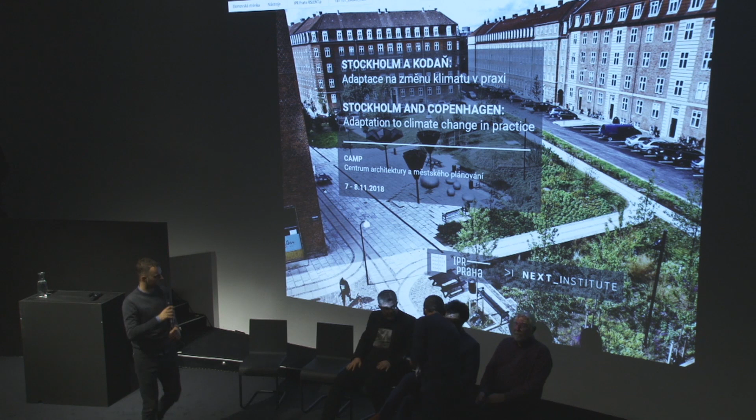Hello everyone, thank you for your presentations. I'm Vít Masaryk from the Czech Green Party. I've been dealing with urban development for quite a few years, and I'm glad you came to share your experience with us. I have one question for our foreign guests and another for people from IPR here. The first is whether you could share your experience with the debate about energy use in your respective cities, because one thing is green infrastructure, and another is what energy drives all the urban facilities, whether this is a topic of debate in your cities or not. The other question is to compare the current state of working with trees in the streetscape in Prague with what we saw here, especially from Stockholm, and the current problems and challenges here.

If I could just jump in about energy, because that's not really the topic of tonight's conference, but I could say something briefly. When we transform garden waste and make biochar, we get about 25% excess heat, and that is used in the district heating system. So we get environmentally friendly energy from our production of biochar. That's one thing that could happen, and we didn't know that from the beginning.